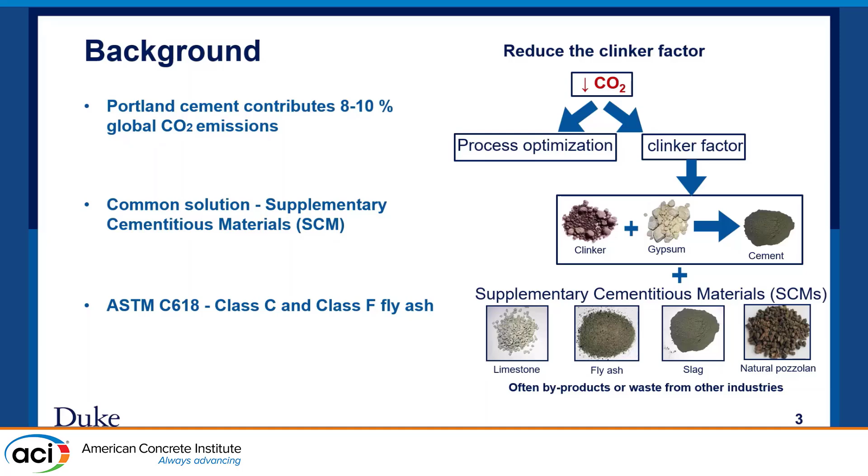These supplementary cementitious materials include limestone, fly ash, slag, and natural pozzolana. Today I'm going to talk mostly about fly ash because, as per ASTM C618, Class C and Class F fly ash have been verified for use as supplementary cementitious material in concrete.

For the research motivation of this experiment, we know that a huge amount of coal combustion ash has been produced and disposed of carelessly in past decades, and we have very limited supply of coal combustion ash in today's time.

As per the revised ASTM, recently updated in 2023, it also includes other coal combustion ashes beyond Class C and Class F fly ash, such as bottom ash or harvested ash, as supplementary cementitious materials that can be used in concrete.

Looking at the problems created by the careless disposal of coal combustion ash produced in the past, and the limited supply today, if this ash is disposed of in unlined ponds, it creates a leaching problem in different water resources. To solve this problem and utilize this coal combustion ash...

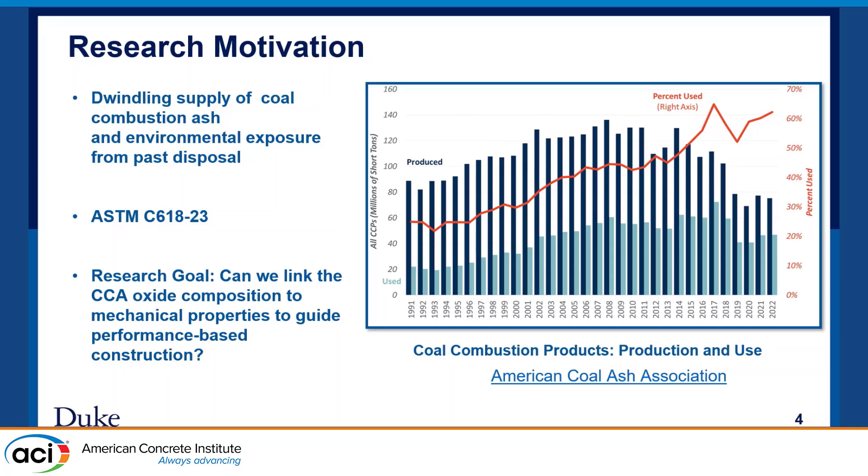...I decided to do this research. My motive, and I also see the opportunity, is to link the oxide composition of coal combustion ash to the mechanical properties of concrete samples made using that ash.

So for the methods, the first one is chemical composition.

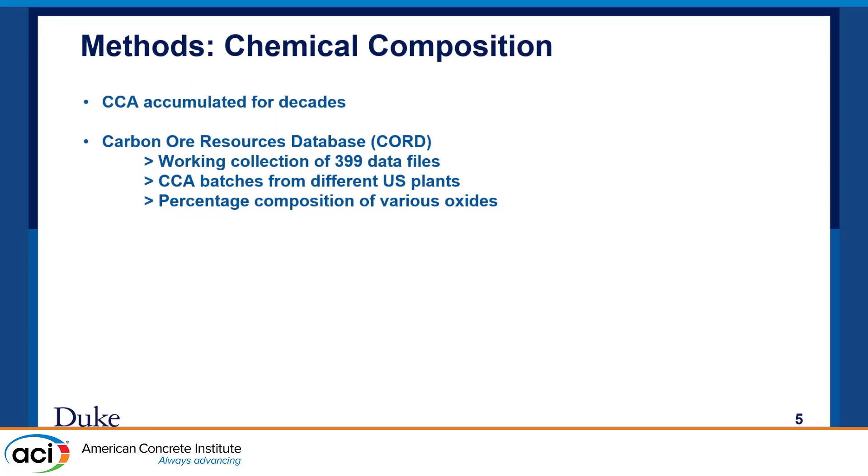We have a database produced by NETL that has data files for almost 400 coal combustion ash batches from different parts of the US, and they have also provided the percentage composition of various oxides in those coal combustion ashes.

This first picture explains the supply of coal for different coal-fired industries. This picture explains the coal power stations that have known fly ash composition, projectable fly ash composition, and non-projectable fly ash composition. This picture explains the calcium oxide composition in those fly ashes.

We have a limited amount of each batch of these coal combustion ashes, so there is an opportunity to see the mechanical performance of those coal combustion ash concretes and relate them to these oxide compositions.

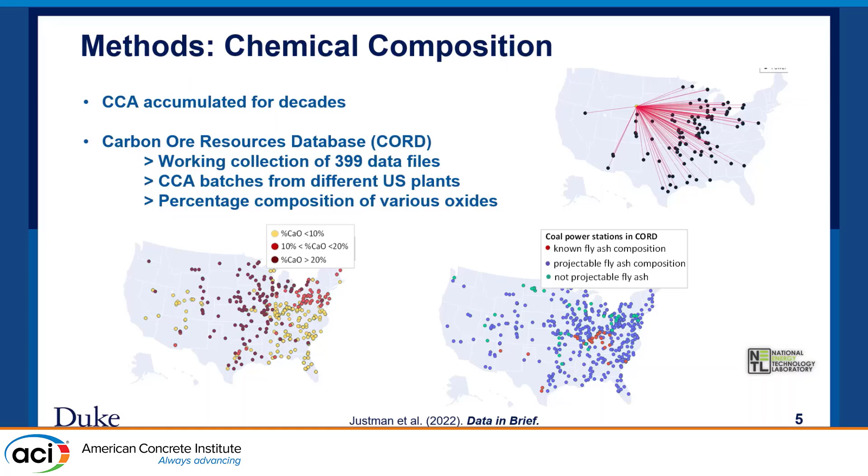With different percentages of coal combustion ash in the concrete, it gives data relative to 0% fly ash concrete, for different curing days, and this depends on the chemical composition of the coal combustion ash.

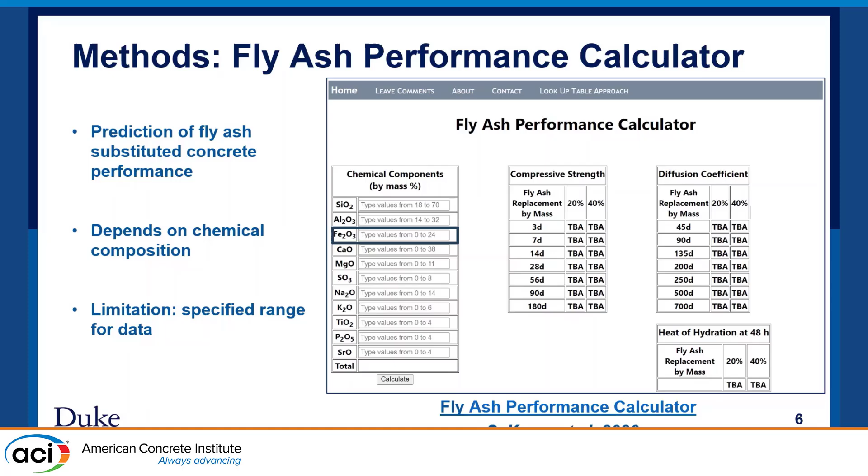As we worked through this method, we saw that there is a definite range for the chemical component percentages in coal combustion ash. If we exceed these values, we couldn't get a result from this calculator. Some components exceeded these values and it couldn't give us the result we wanted, so this could be a good opportunity to expand the study of this calculator as well.

For the compressive strength test, we started with the fly ash we had in comparatively larger amounts. We substituted 0 to 40% of that fly ash in our samples and tested them at different days for compressive strength.

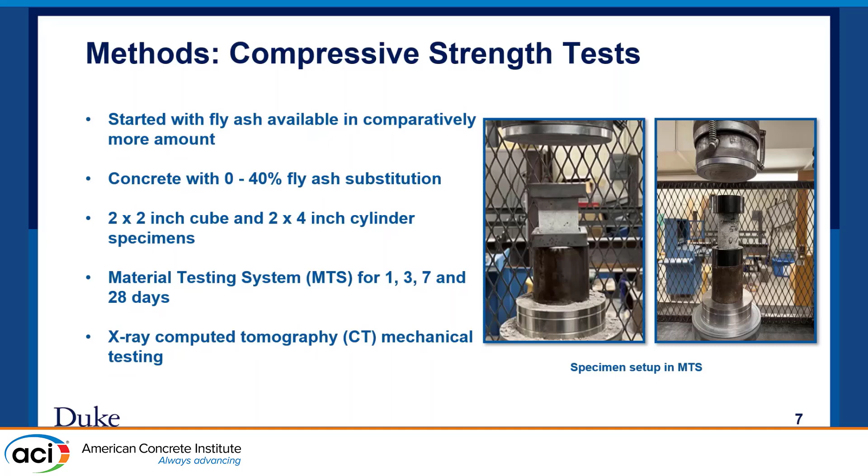After this, we moved to X-ray computed tomography mechanical testing of those samples. X-ray computed tomography is an imaging technique used to create detailed images of the internal structure of the specimen being scanned.

So this setup has an X-ray source and the detector facing each other, and the sample to be scanned is kept in between those. When the X-ray passes through the samples we want to scan, we get different X-ray radiographs that we can reconstruct and segment.

And get the results that we want to see. Also, we can get the 3D modeling of the samples being scanned. So this method can be used for non-destructive as well as destructive tests we want to do for the samples.

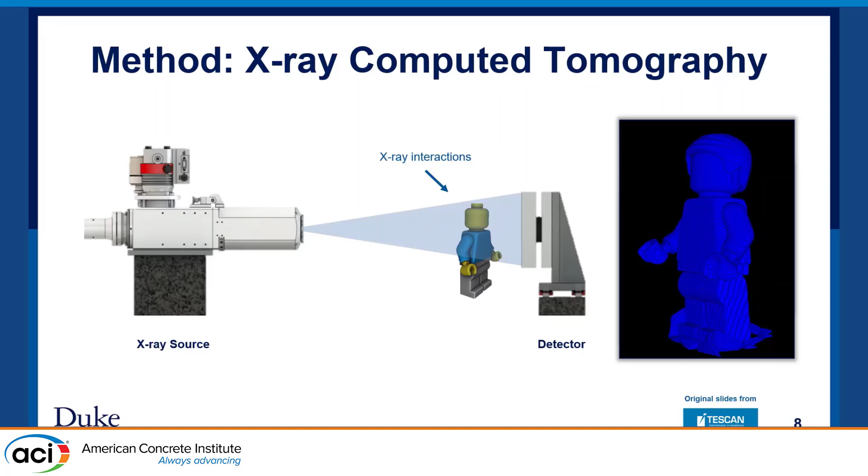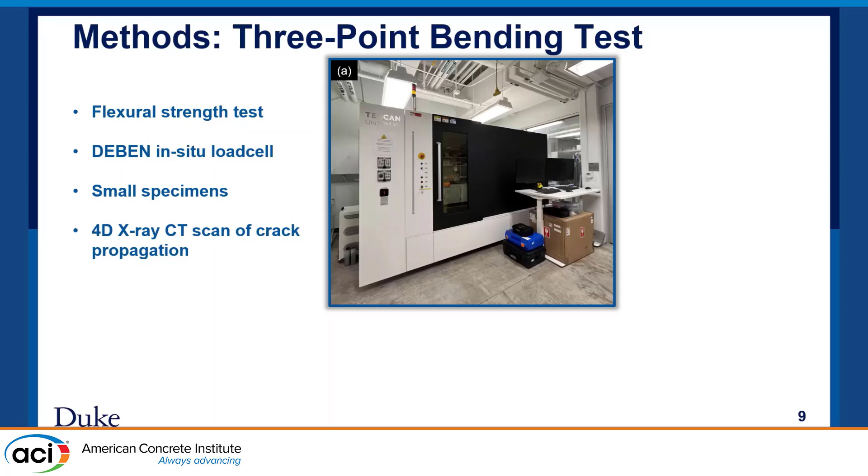So for the 3-point bending test, we use this machine by TESCAN named Unitom XL. This is an X-ray CT machine that we use for the 3-point bending test. It has a Deben stage in-situ load cell that mounts the sample to be tested and scanned throughout the time and throughout the loading, giving a 4D X-ray CT scan of crack propagation.

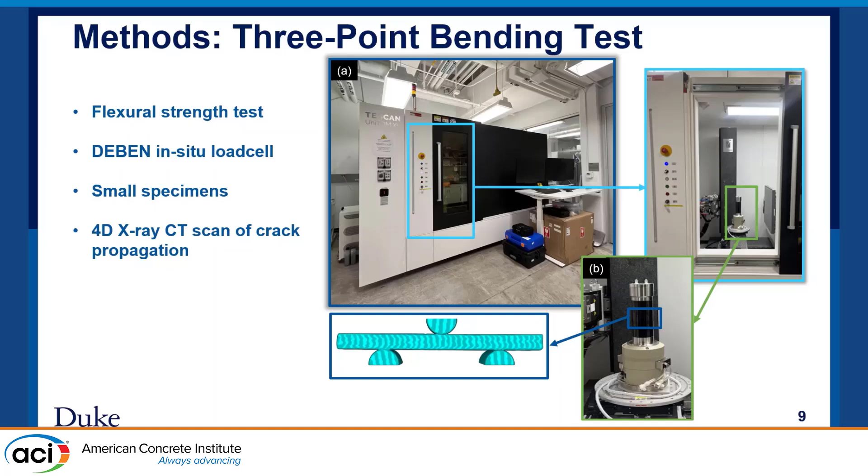Also, due to the use of fly ash in concrete, we know that there will be a reduction in air content. So to overcome this, we have to find the specific amount of air entrainer to be used in that concrete to ensure workability and durability. So we tested for the specific amount of air entrainer to be used in the concrete.

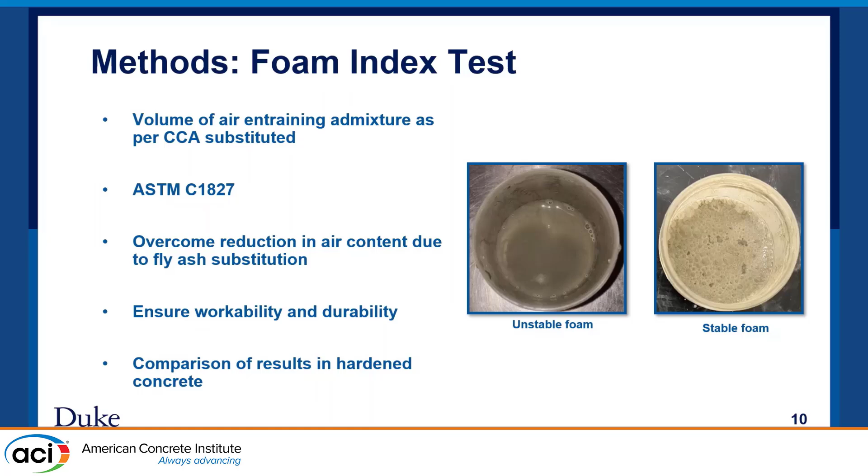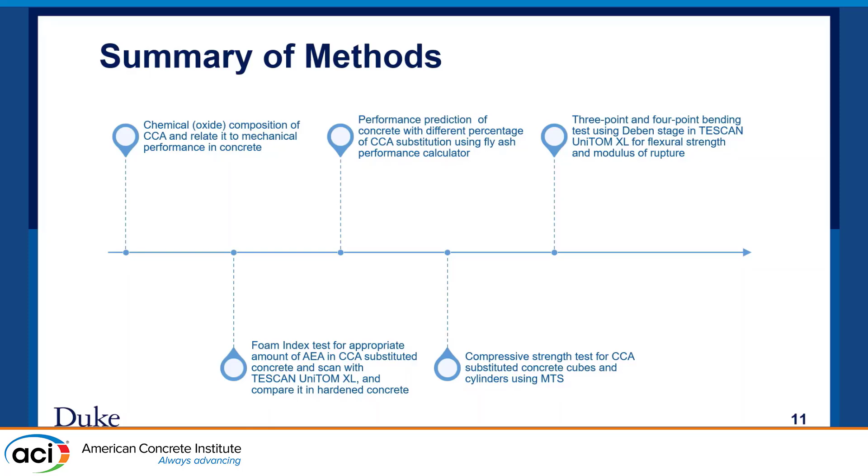We also plan to compare the results we get from these tests in the hardened concrete over time. So the methods we use: first we had the chemical composition of those coal combustion ash, then we looked for the specific amount of air entrainer to be used in the concrete, and then we moved to performance prediction of the coal combustion ash concrete relative to the 0% fly ash concrete, and then to mechanical testing like compressive strength test and 3-point and 4-point bending test using the X-ray CT machine we have.

So for the results we have, this is the presentation of the chemical composition of certain coal combustion ash for the year 2002. These are the results for different plants all around the US.

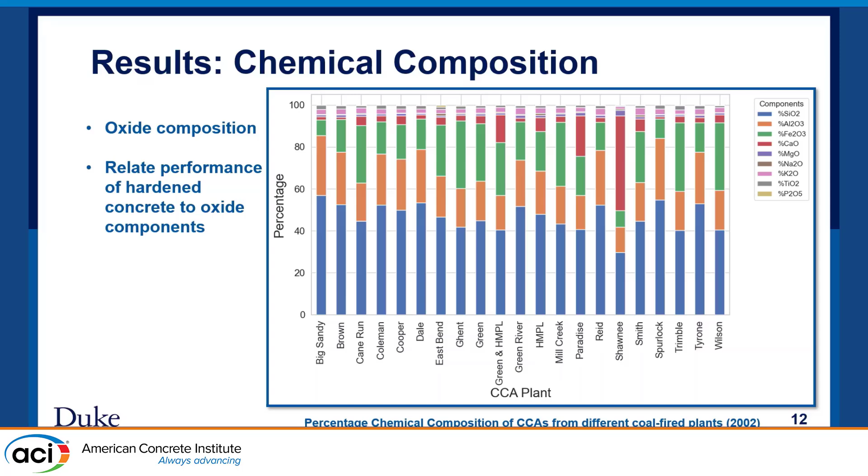And this is the result from the fly ash performance calculator. We can see that for some percentages of fly ash in the concrete, it shows better results than OPC. But for some, it doesn't predict better performance than OPC.

If we do not get the desired result from the substituted concrete, we can also use that fly ash or coal combustion ash as filler material, which is well known as controlled low strength material.

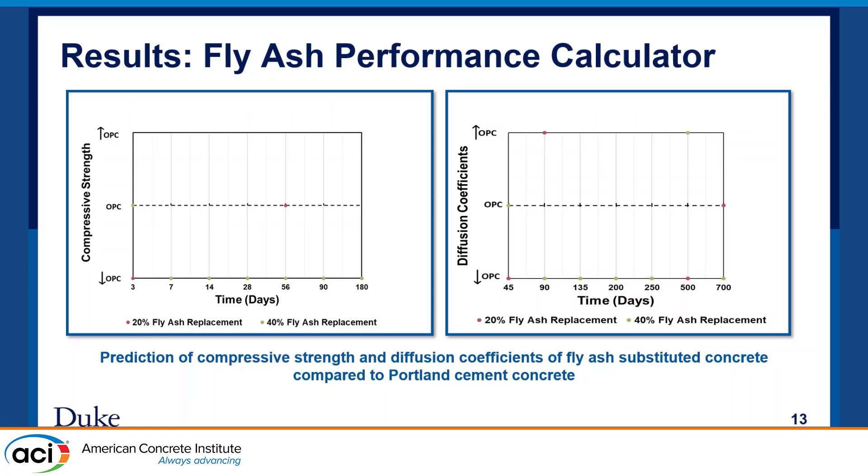And this is the result from a foam index test. To the left, there is the X-ray CT scan of the foam test we did. The first one is for the unstable foam, and the second one is for the stable foam. And to the right, there is the amount of air entrainer we have to use for the concrete.

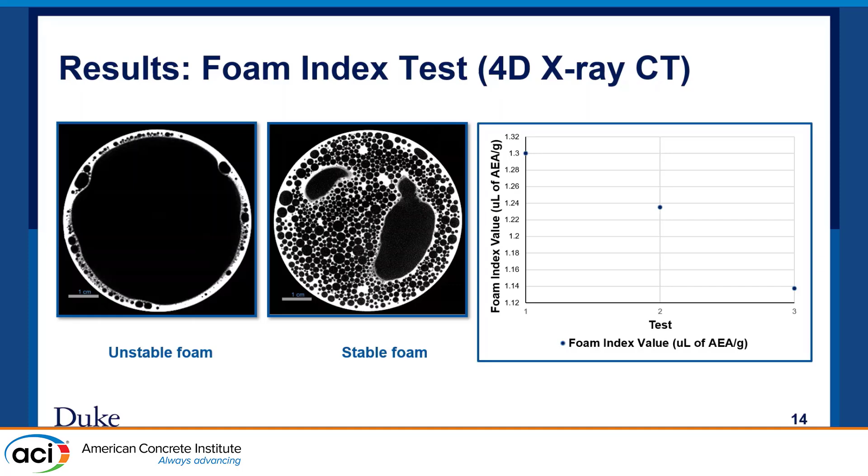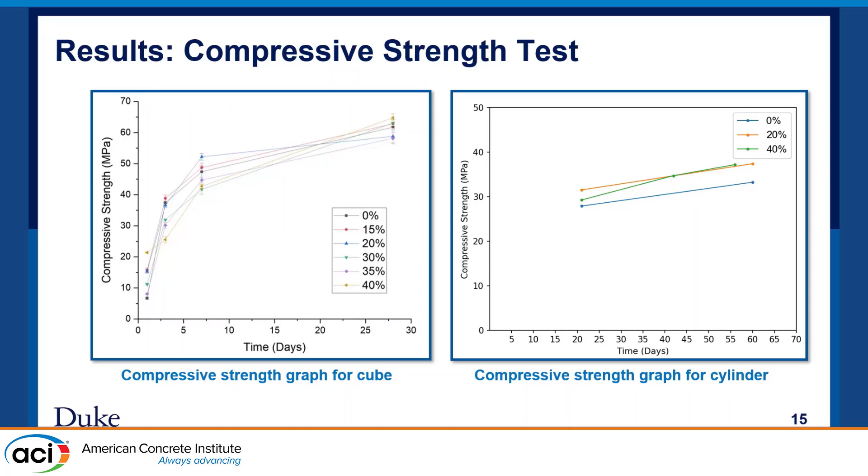And this is the result for the compressive strength test. This is the preliminary result for the compressive strength test. We look forward to using our actual 4x8 concrete samples for this test, as well as we plan to do the flexural strength test for the same sample size for further research.

For the ongoing and next steps, we are planning to do a 3-point bending test for flexural strength, and a 4-point bending test for modulus of rupture. With our machine, we can see the crack propagation over time as the specimen is being loaded.

For this experiment, we have to have very small samples, and we use 3D printed molds for the preparation of samples. But we face the problem of getting them out of those molds. Even if we could get the samples out, they would break, which would hamper our test. So we are looking for alternative molds we can use for the samples for this machine.